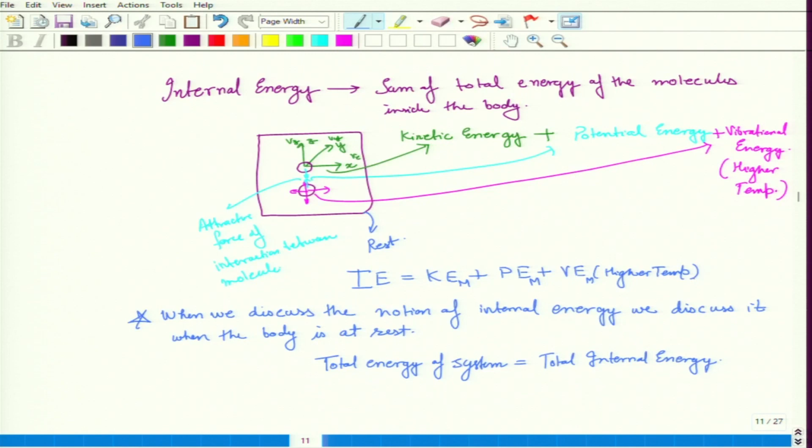Okay, so then I came up with the concept of what is an ideal gas, and we know that for the ideal gas the main assumption is that there is no force of attraction among molecules. We discussed in the last class that this force of attraction leads to the potential energy of the molecules, so because there is no force of attraction, there is no potential energy of the molecules.

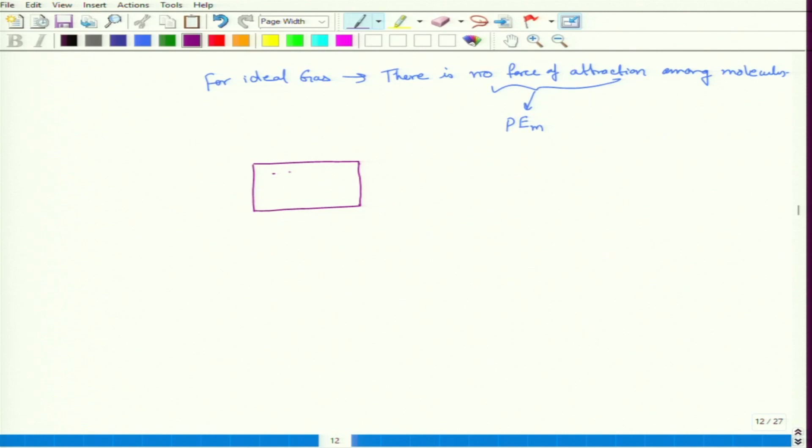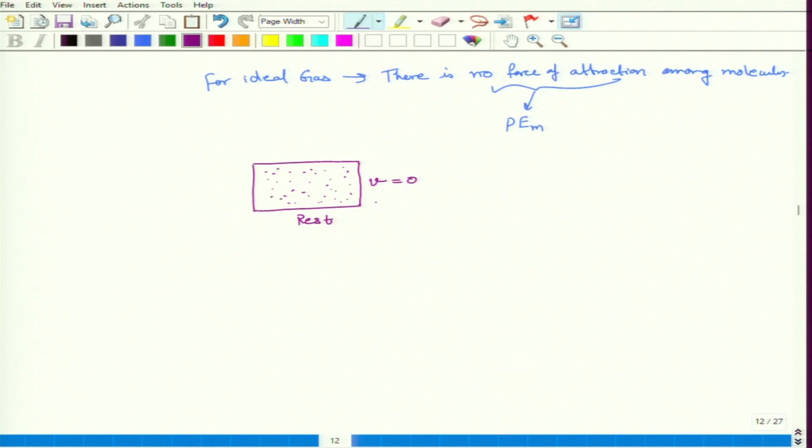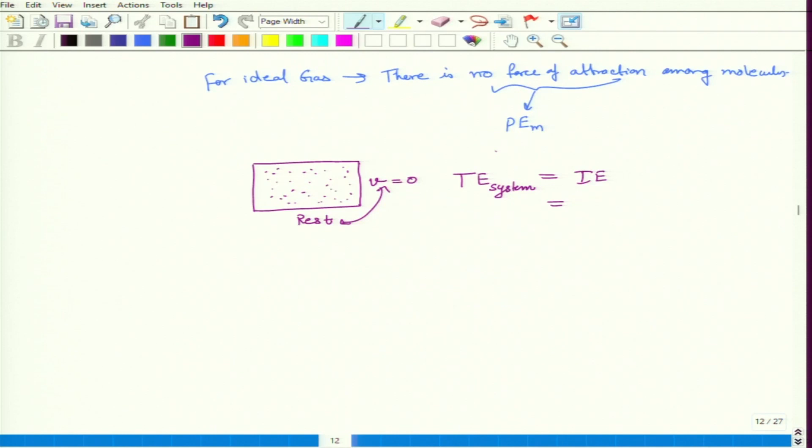So now let's again make a system which has some molecules, and this is at rest. The velocity of this body as a whole is 0. If I have to write the total energy of this system, then this is just the internal energy, and we are considering the assumption that it has moderate temperature, so that vibrational energy is also 0.

So the total energy of the system is the internal energy, and internal energy is the sum of kinetic energy, potential energy and the vibrational energy. Potential energy is not there because of the ideal gas assumption, and vibrational energy is not there because we are considering a moderate temperature. So the total energy of the system is just the kinetic energy of the molecules.

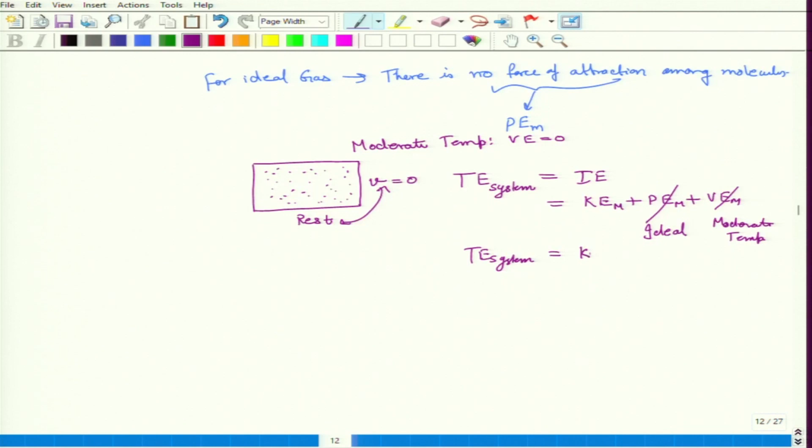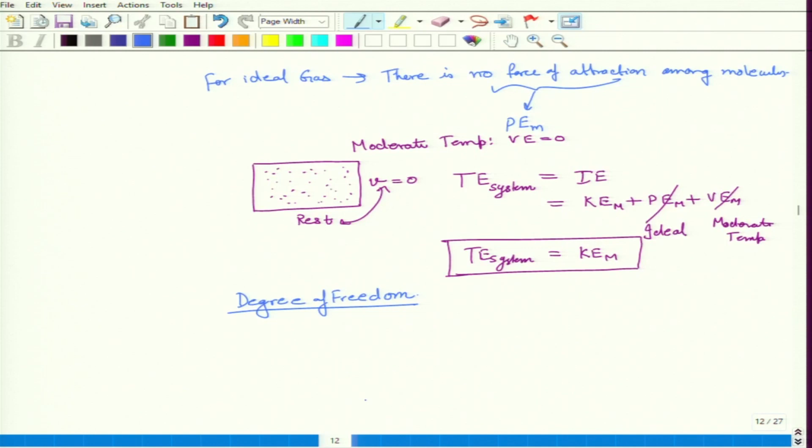So now when we arrive at this concept, we are going to discuss what is degree of freedom. So if I take a monoatomic gas, what are the examples of monoatomic gas? These are helium, argon, neon, krypton, Rn. So these are the examples of monoatomic gases.

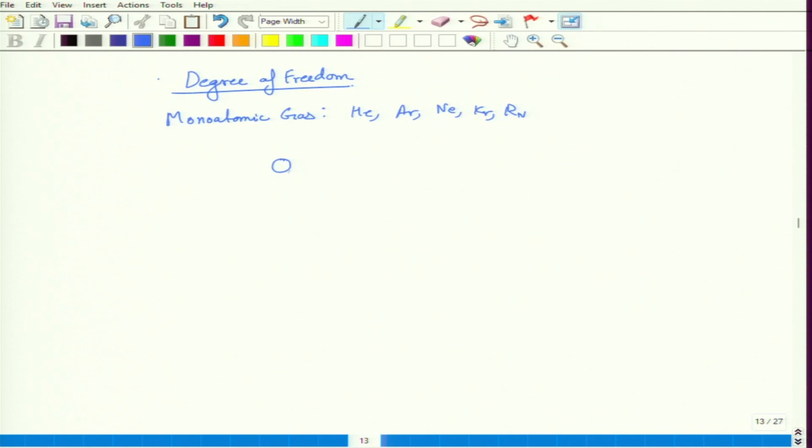In monoatomic gases there is only one atom; there are no bonds present between two atoms to make one molecule. So this is itself a molecule, and it has different kinds of kinetic energy associated because of its motion. In a very general way, we always have 3-dimensional space, x, y, z. So we have velocity in x, velocity in y, and velocity in z.

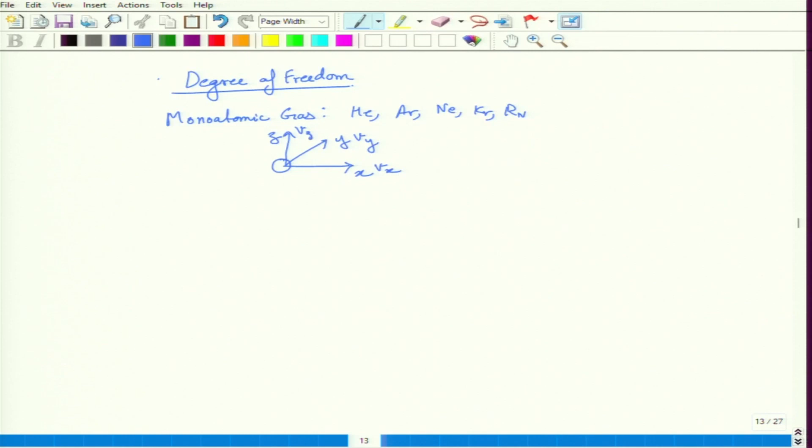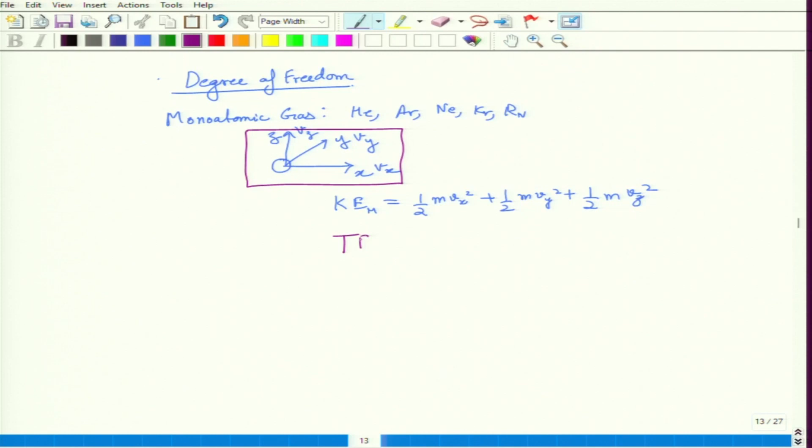So the total kinetic energy of this gas molecule is ½ m vx² + ½ m vy² + ½ m vz², because of the additive nature of the energies. We have already discussed that there is no potential energy and there is no vibrational energy, because we are considering the assumption of ideal gas as well as the moderate temperature. So this molecule exists inside the system, and the total energy is just this.

So if we want to know what is the degree of freedom for the case of monoatomic gases, I can define it as the number of independent terms present in the expression of total energy. And this total energy is actually the total internal energy, so the number of independent terms present in the expression of total internal energy.

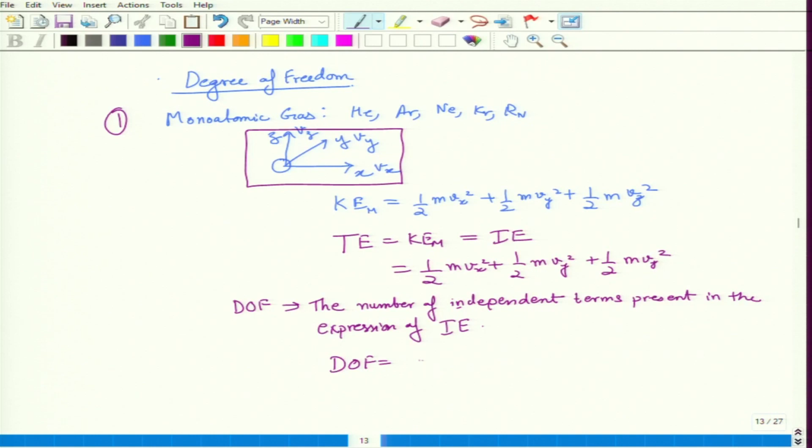So for the case of monoatomic gases, let's call it 1, the degree of freedom is 3. Okay. So now let's discuss the case of diatomic gases.

So the case of monoatomic gases is a bit easier, but in the case of diatomic gases, we have two atoms that have a covalent bond and form one molecule. So examples of diatomic gases include oxygen, nitrogen, hydrogen, and maybe others.

So in the case of all these examples, let's say the system is this, and we are considering the O2 oxygen molecule. Then we have this kind of system, and now we have to imagine the different kinds of energy possible with this kind of system. We are very sure that because we are considering the ideal gas, the internal energy here is just because of the kinetic energy present, and this is essentially the expression of kinetic energy due to the molecule.

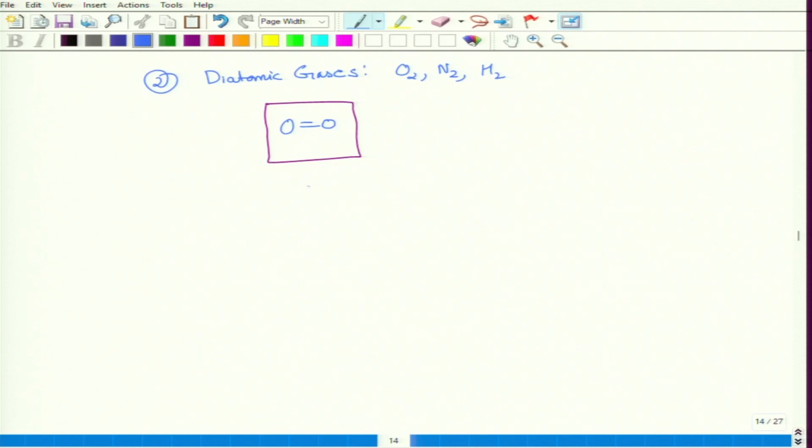So this is the configuration. You can assume it like this: one body tied with something like this. So what are the different kinds of motion that are possible if we have to see the simple kinetic energy? If this is x, this is y, this is z, we have two atoms bonded with this pen, let's say, and now we need to imagine different kinds of energy.

If we translate in the horizontal direction, then it is the kinetic energy in the x direction. At the same time, we can have the velocity in the y direction, so this can go like this. This is the kinetic energy in the y direction, and then we have this in the z direction. So these are the three simple kinetic energies that exist because of the velocity of this system: half mvx square plus half mvy square plus half mvz square. In the x direction, this is because of the translation, and these are in the y and z directions.

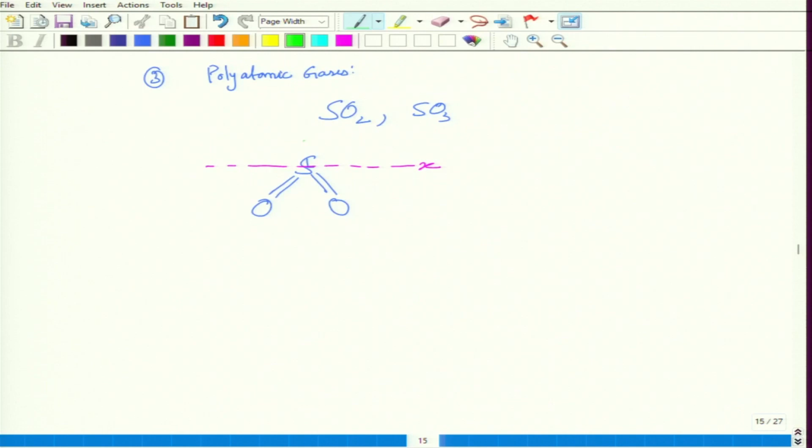So let's say this is X, this is Z, this is Y. So this molecule, let's say this is one molecule, and now three energies because of the movement, because of the motion of this molecule in the three directions, that is X, Y and Z.

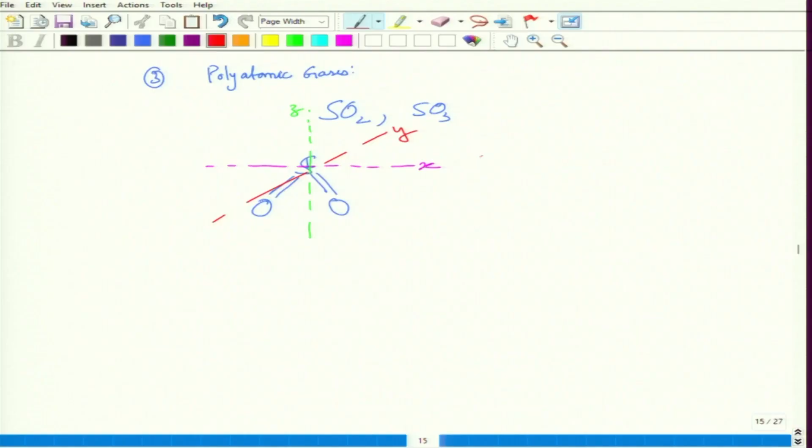Okay, so the kinetic energy is the usual half m Vx square plus half m Vy square plus half m Vz square. So this is the kinetic energy because of just simple motion.

Now let's look at the different kinds of rotational motion that exist. So now in this case we cannot neglect the rotational motion that we neglected for the monoatomic gases, because there is some significant amount of inertia present. So moment of inertia is present. So now this is the rotation. So maybe I can take this.

So now we have this molecule. So one molecule is there, one molecule is there, one molecule is there. So this can rotate in one plane. So let's say this is the x y plane, and this is rotating perpendicular to this plane, so that is the inertia in the z direction. So that is 1 by 2 Iz omega square.

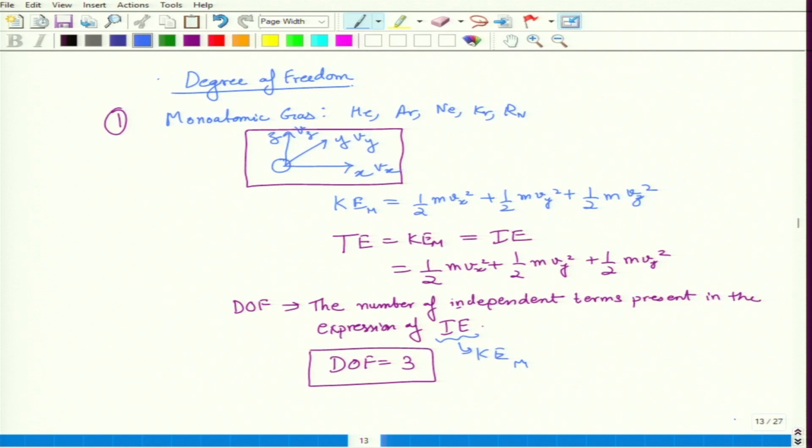Okay, so now the total number of terms are 1 2 3 4 5 6. So the degree of freedom for the case of polyatomic gases comes out to be 6. So if you didn't understand, we can go through it again because it's a bit difficult. So for monoatomic it is easier. So this is one, and this is in x direction, y direction and z direction. So this is for one molecule.

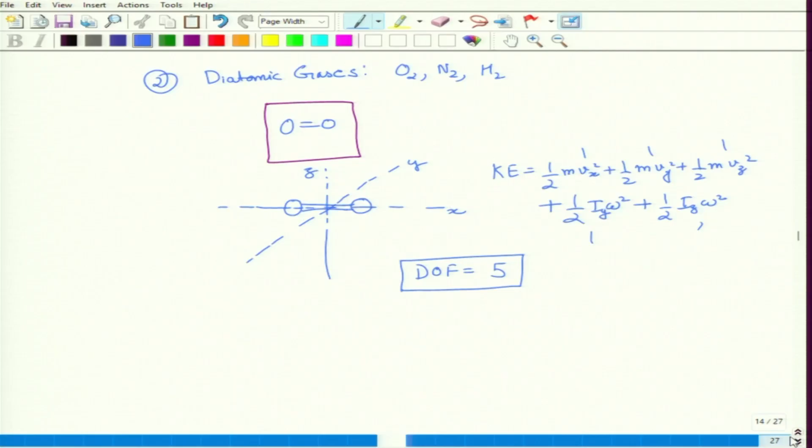Now if we have two molecules, then this will go like this. This is in x direction, this will go in y direction, and this will go perpendicular to this plane, so that is z direction. And now we have to consider the rotational motion. So it can rotate about this axis, it can rotate about this axis, and it can also rotate about this axis, but that is very small. So the total degree of freedom comes out to be 5.